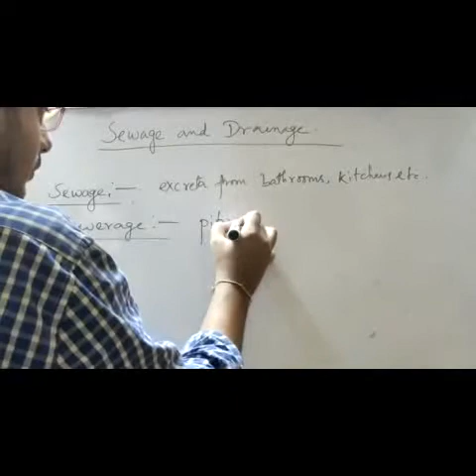There is another term, that is sewerage, related to sewage. What is sewerage? Sewerage refers to the physical facilities like pipes, lift stations and treatment and disposal facilities through which the sewage flows. So sewerage means a pipe or network system through which the sewage flows. These are the excreta from bathrooms, kitchens, etc. And these are the pipes or networks through which sewage flows. This is called sewerage.

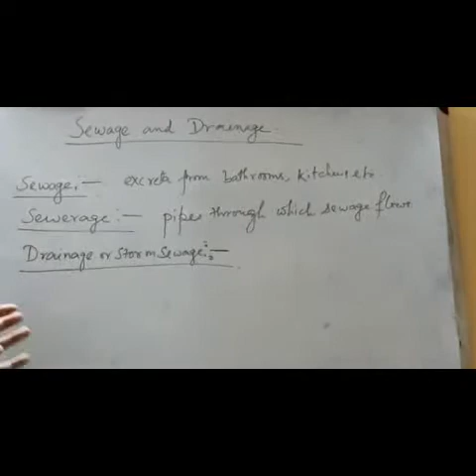The next topic is drainage or storm sewage. What is drainage or storm sewage? It is nothing but the rainfall. The rainfall which is accepted by the runoff is carried by the sewer system or the pipe or underground networks, is known as drainage or storm sewage. That means rainfall.

In terms of runoff, these are the common terms of the solid waste management.

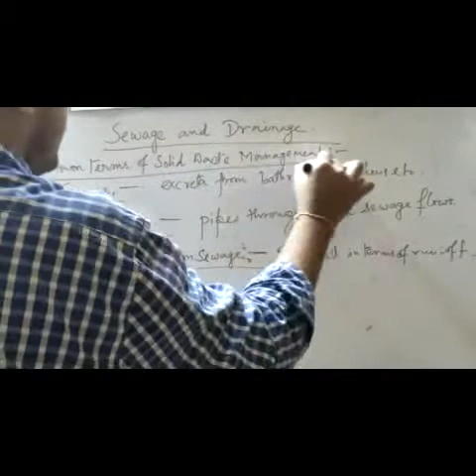So what is the difference between sewage and drainage? In terms of sewage, there are the excreta from the bathrooms, kitchens, sinks, basins, etc. That means there are some hazardous substances. But in the drainage or storm sewage, storm sewer, there is no type of hazardous substance. It means this only consists of runoff.

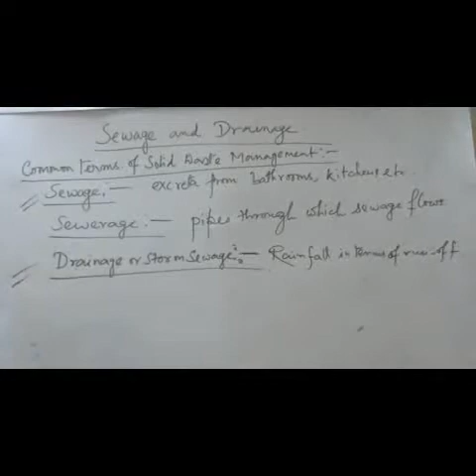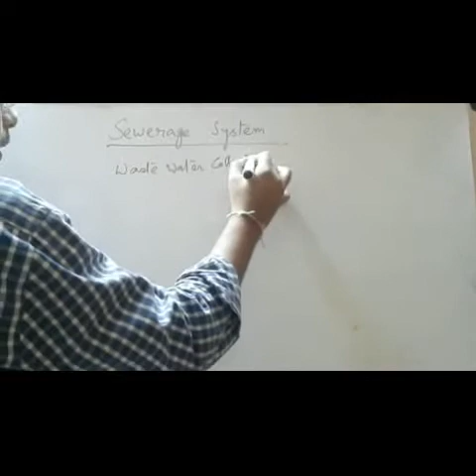The next topic is sewerage system. What is sewerage system? A sewerage system or wastewater collection system is a network of pipes, pumping stations and appurtenances that convey sewage from its point of origin to the point of treatment or disposal. There is another term, that is wastewater collection system. Both are same.

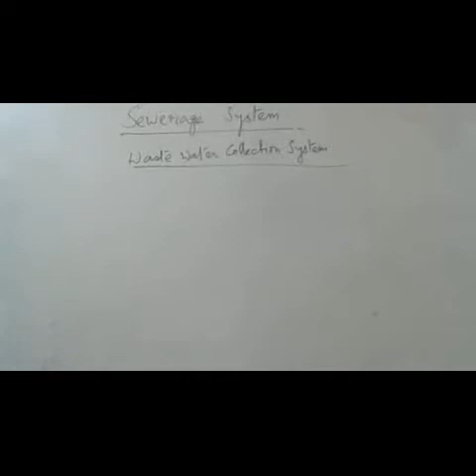So please write down, the sewerage system is the network of pipes, pumping stations, which convey the sewage from its point of origin to the point of disposal.

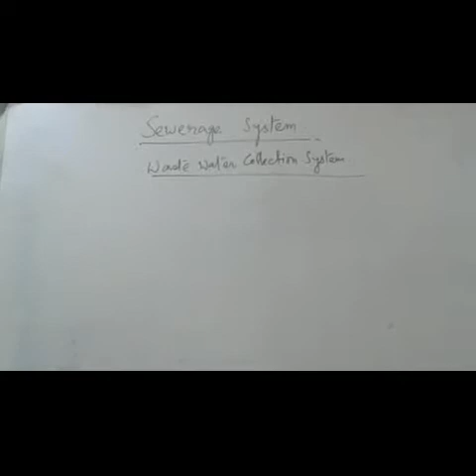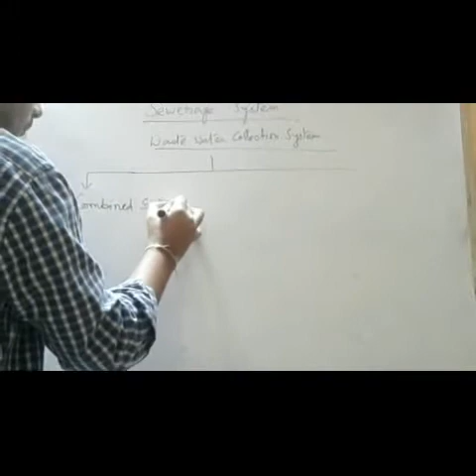There are three types of sewerage system. The first one is combined system. The second one is separate system, and the third one is alternative system.

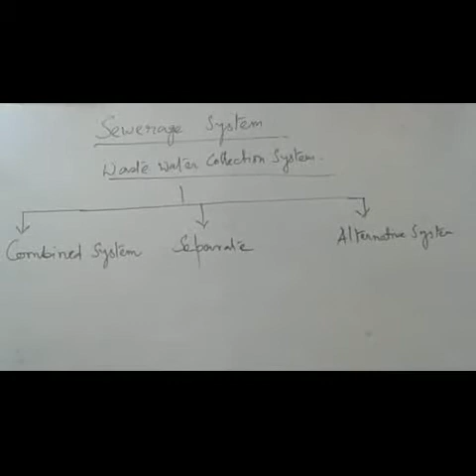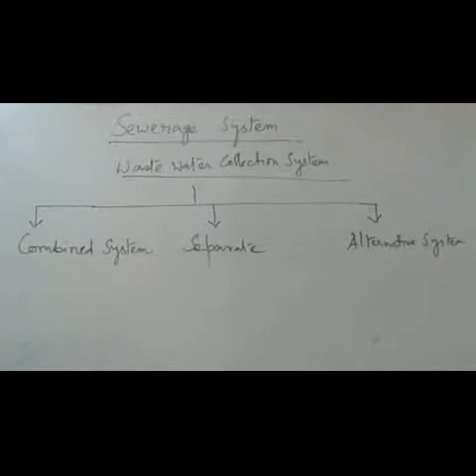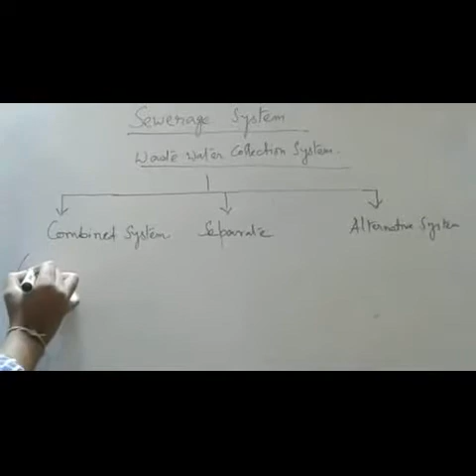First, combined system. Combined system means in this system which carries a mixture of both the domestic sewage and storm sewage, which is called combined system or combined sewer, by which the sewage is disposed or conveyed. So in this combined system there are two types of sewerage that were conveyed: one is domestic sewage and another is storm sewage.

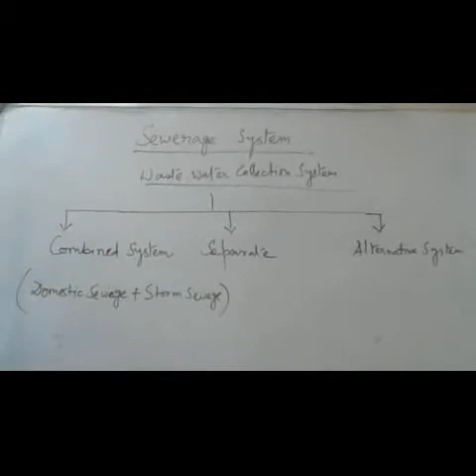But in the separate system there is either domestic sewage or storm sewage. It is conveyed separately. That is why it is called separate system. So it is either domestic sewage or storm sewage.

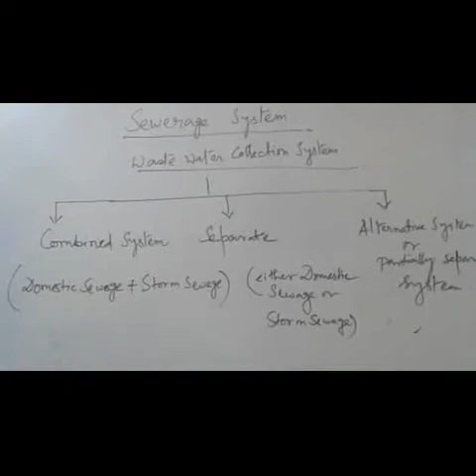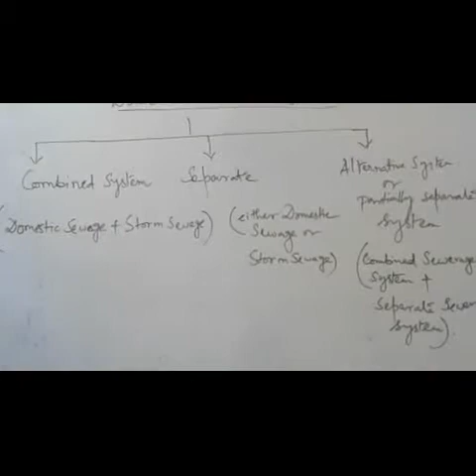And in the alternative system there is also another name, that is partially separate system. So in the partially separate system, it is a combination of the combined sewerage system and separate sewerage system. This type of sewerage system helps to decrease the load from a combined sewerage system and the lag of the separate sewerage system. So it is a combination of combined sewerage system and separate sewerage system.

Now we will discuss about the advantages and disadvantages of these three systems: combined system, separate system and partially separate systems. First, advantages of combined system.

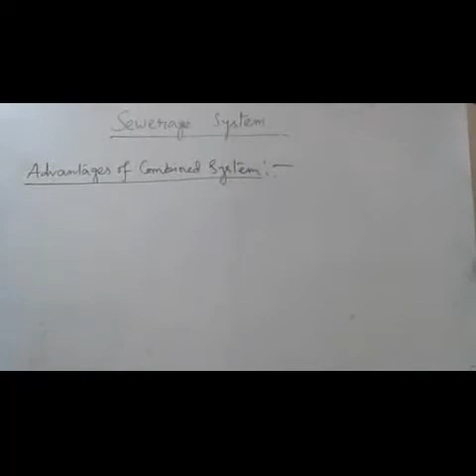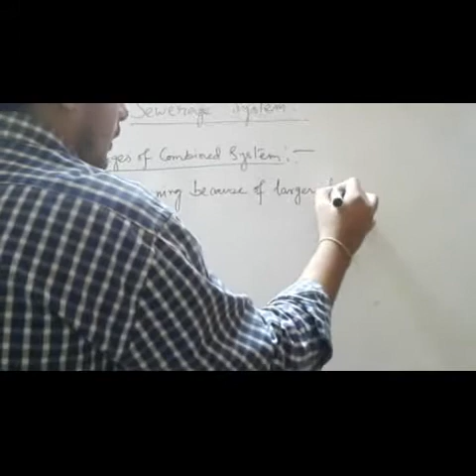The first advantage of combined system is easy cleaning because of larger diameter. That means the diameter of the pipe through which the sewage is carried is very large. That is why the cleaning of the pipes is very much easy. The second thing is very low maintenance cost.

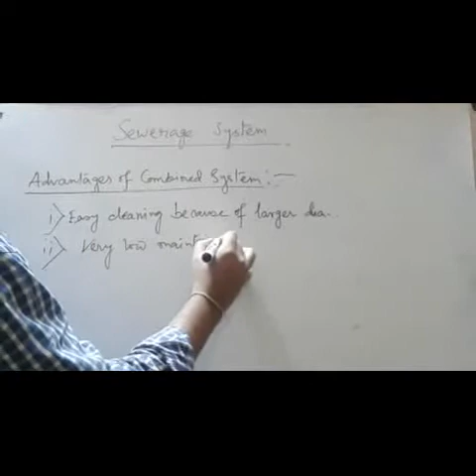Very low maintenance cost. It is a big thing because maintenance is a big part of a project.

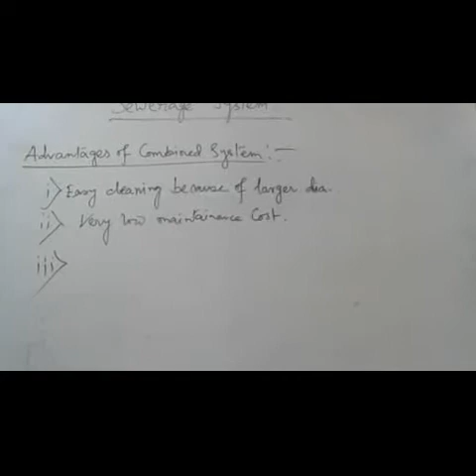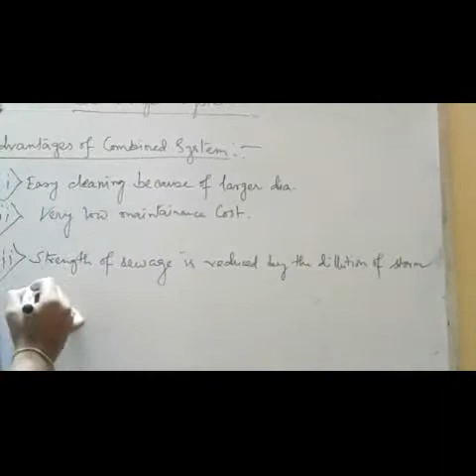The third thing is the strength of the sewage is reduced due to the dilution of the sewage by storm water, as it is a combined system. The strength of the sewage is reduced by the dilution of storm water. What is the actual effect of this? The economic life of the pipe network is increased by this condition.

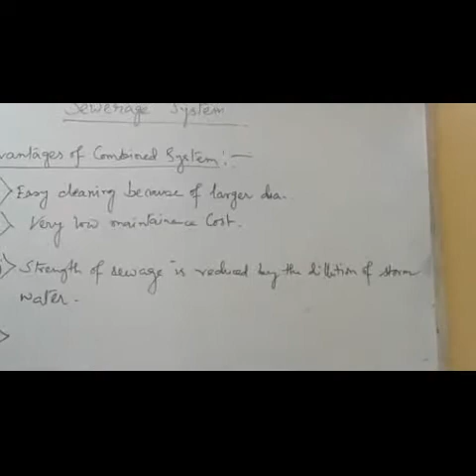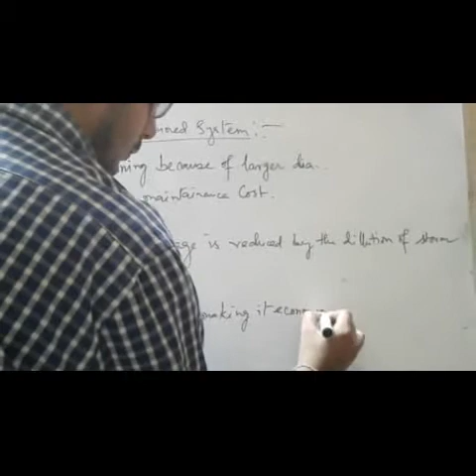And the fourth one is the system requires only one system of sewer. That means as it is a combined system, the system requires only one system, one set of sewer, making it economical. So these are the four advantages of the combined system.

Now we will discuss about the disadvantages of the combined system.

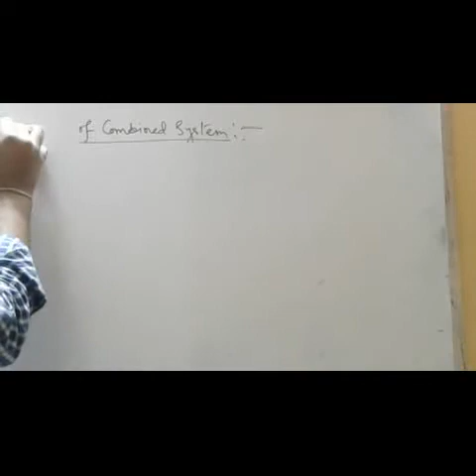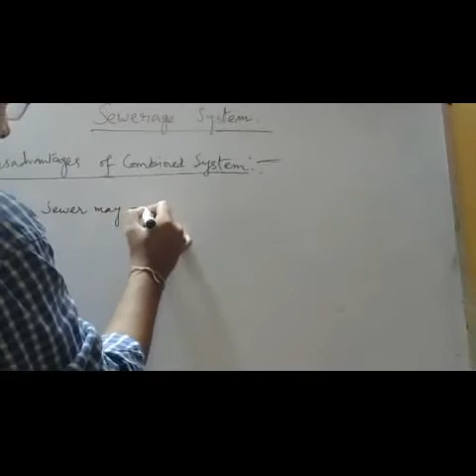The first thing is sewer may overflow in the rainy season so that it may damage the environment.

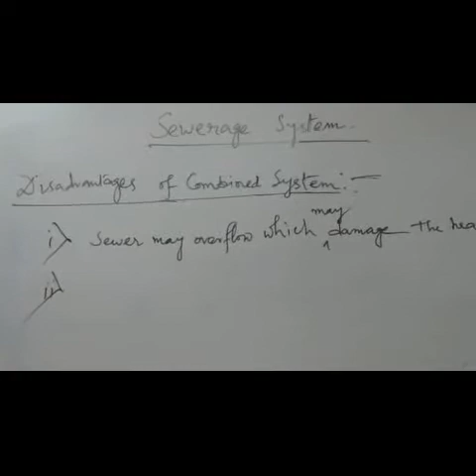The second thing is it becomes dry in the summer season, when the amount of sewage is not present, then it becomes dry and as a result a foul gas is emitted.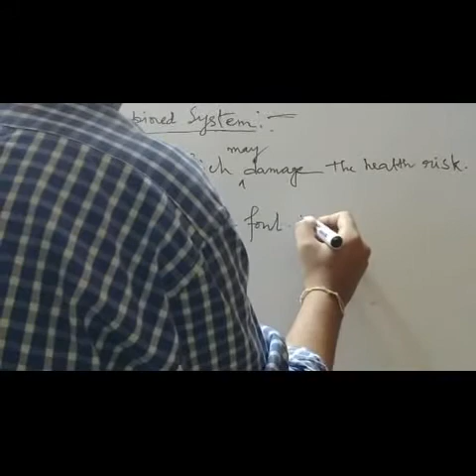The third thing is the load on the treatment plant is more because the storm water is also carried here.

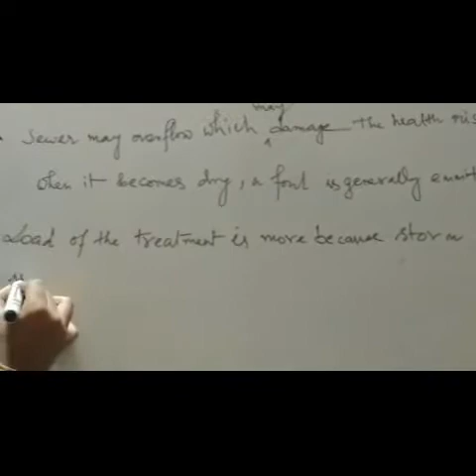The last thing is the system becomes uneconomical when pumping is needed.

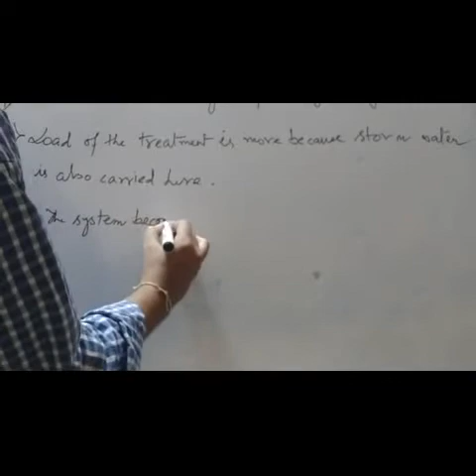So these are mainly the disadvantages of the combined system. Now we will discuss about the advantages of the separate system.

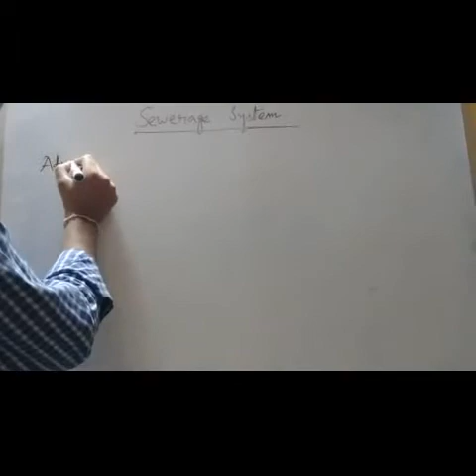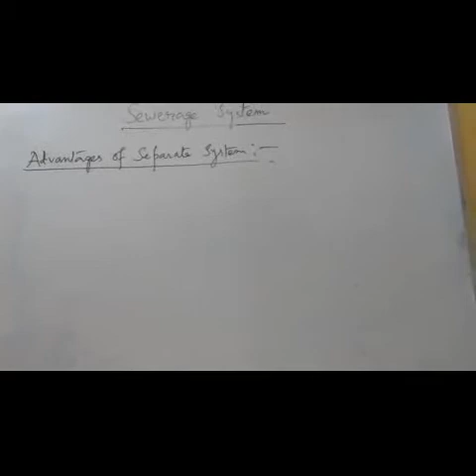The first thing is the load on the treatment plant is less as only sewage is carried to the plant, because in the separate system either the sewage or the storm sewage is carried. So the load on the treatment plant is less.

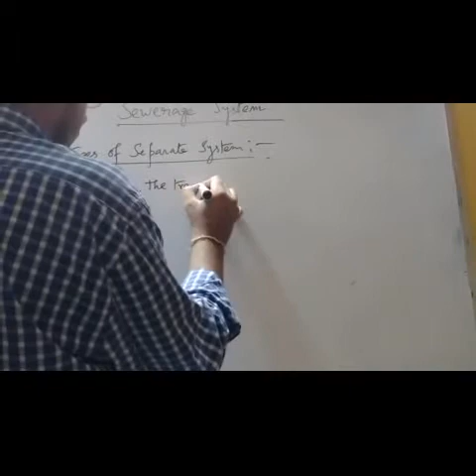The next thing is the size of the sewer is small, thus it is economical. The size of the sewer is small because only storm sewage or only waste water is conveyed.

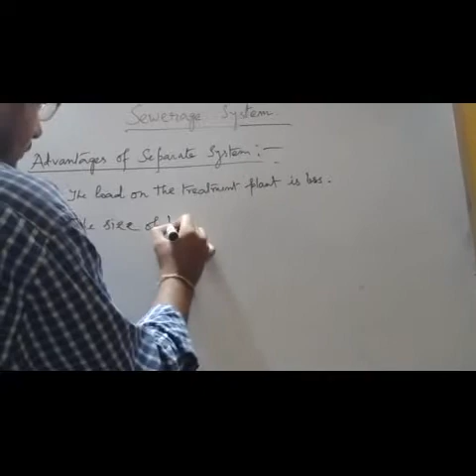The third thing is when the pumping is required, the system is also economical.

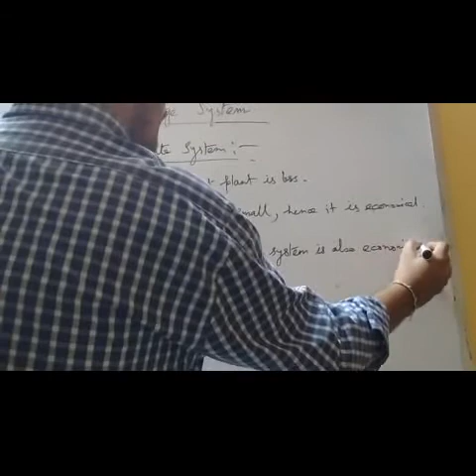And the last thing is the natural water or storm water is not unnecessarily polluted.

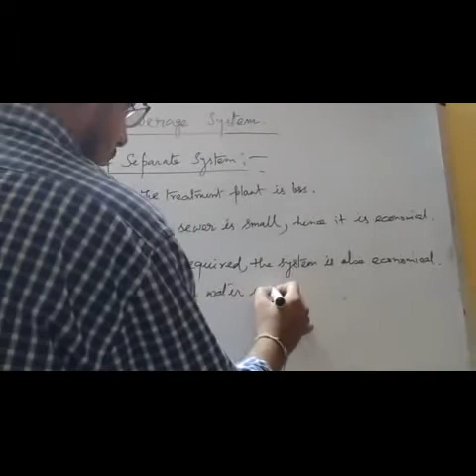These are the main advantages of the separate system. Now we will discuss about the disadvantages of the separate system.

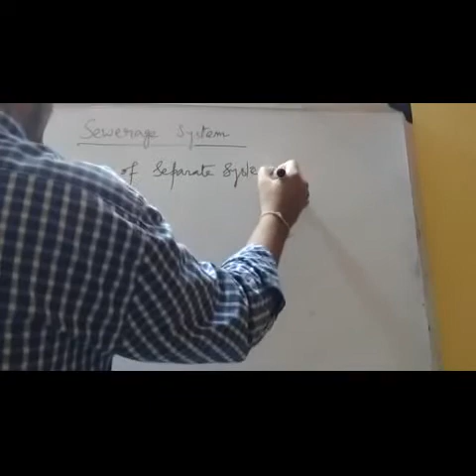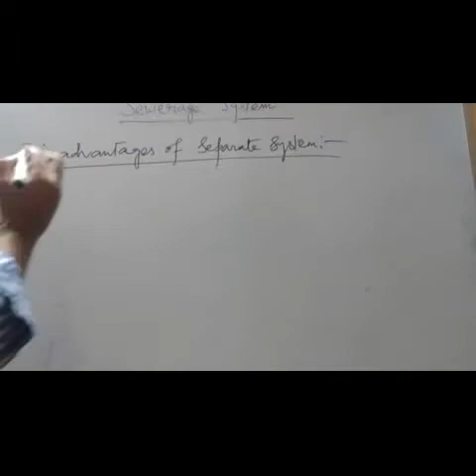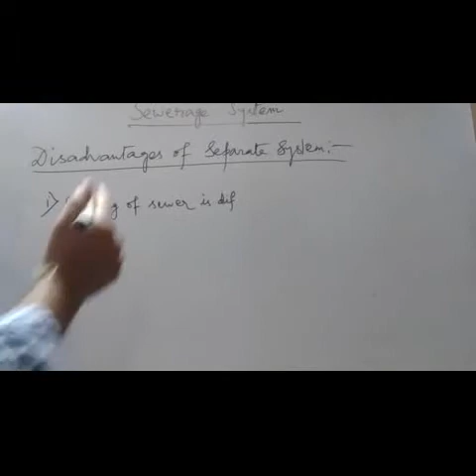As I have already mentioned, in this separate system the size of the diameter is small. So the first disadvantage is cleaning of the sewer is difficult due to their small size.

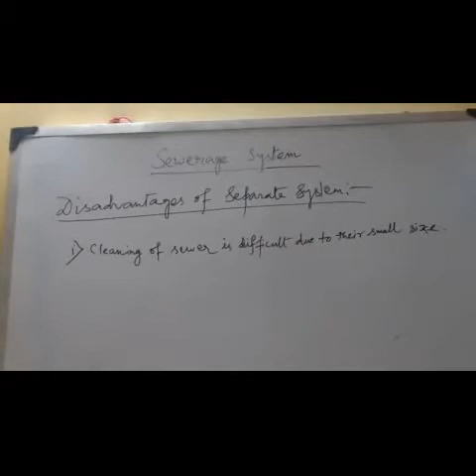The next thing is the self-cleansing velocity is not easily obtained because the diameter of the sewer pipe is small.

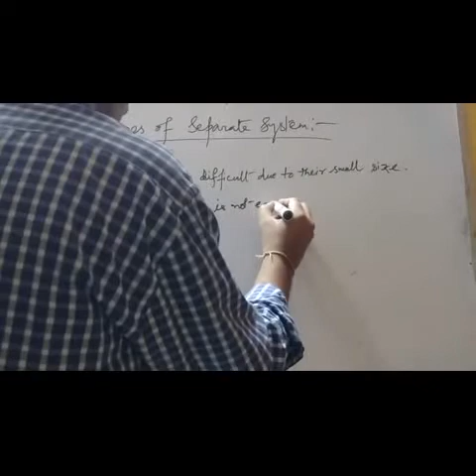And the third thing is the storm sewers come in operation in rainy seasons only because the diameter is small.

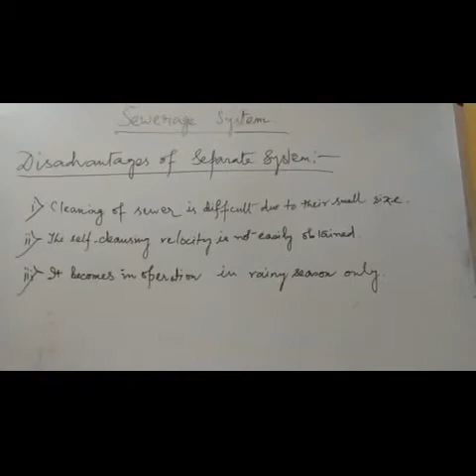Okay, these are mainly the disadvantages of the separate system. Now we will discuss about the advantages of partially separate sewerage system.

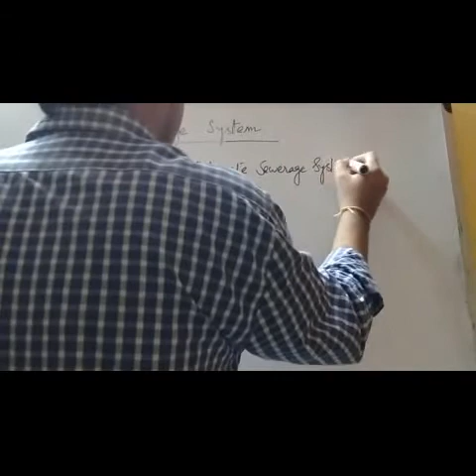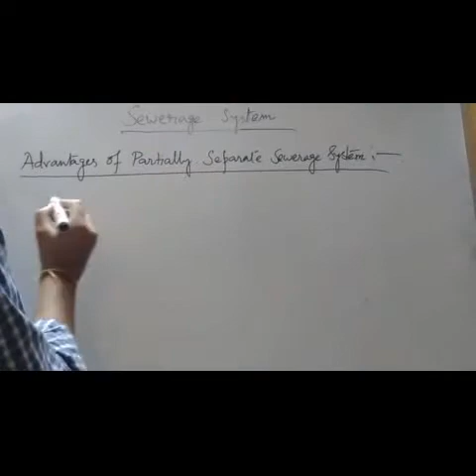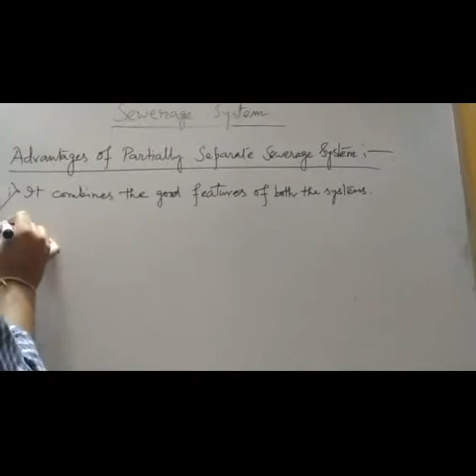The first thing is it combines the good features of both the systems because both the advantages are in there. It is the main advantage of the partially separate sewerage system.

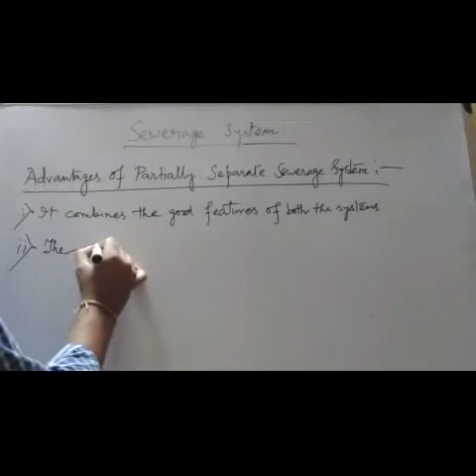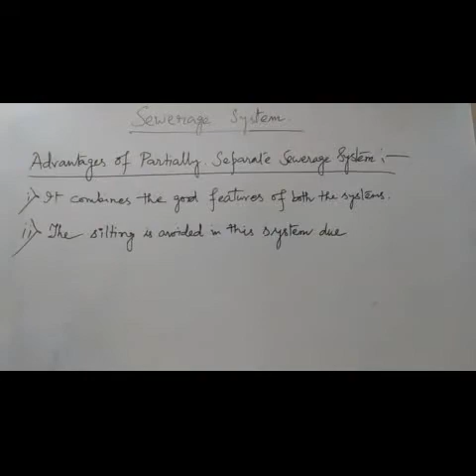And the second thing is the silting in the sewerage system is avoided due to the entry of the storm water. The silting is avoided because when the storm water enters, then silting does not occur.

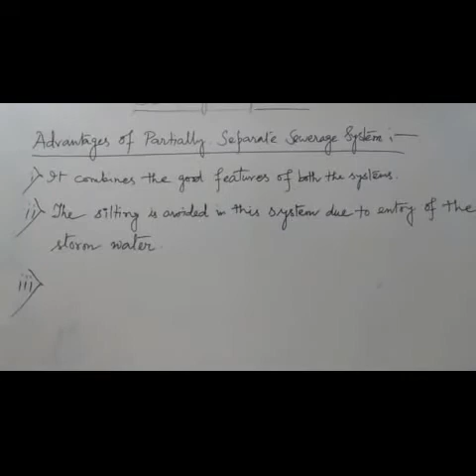And the third thing is the stormwater from the house is easily disposed of.

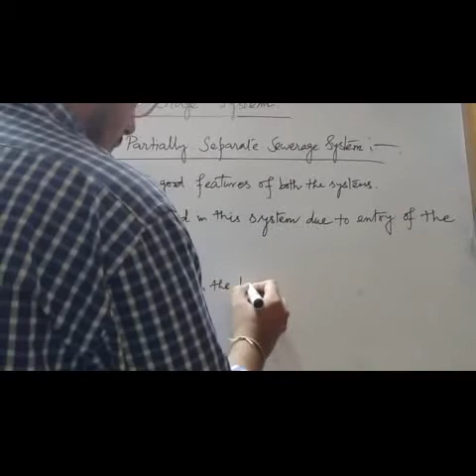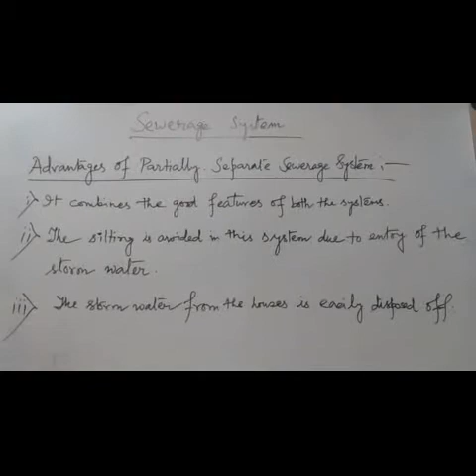And the last one is the sewers are of reasonable size because it is a combination of the separate system and the combined system.

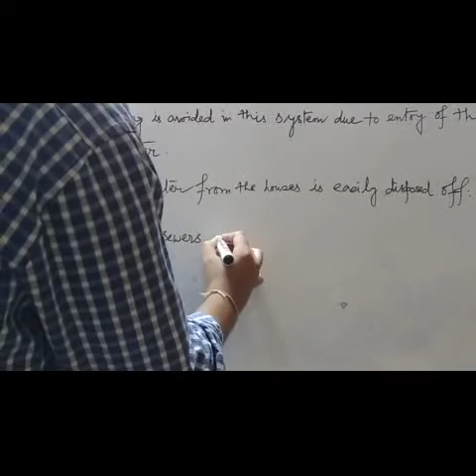So these are actually the main advantages of the partially separate sewerage system. Now we will discuss about the disadvantages of the partially separate sewerage system.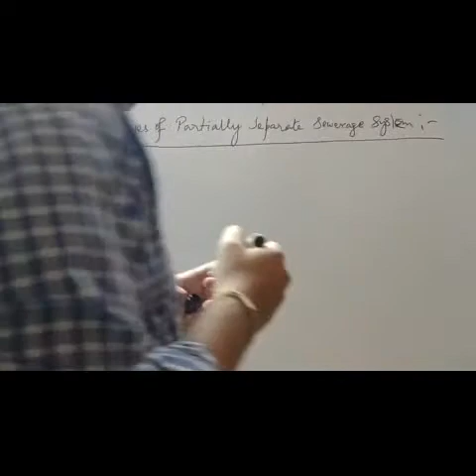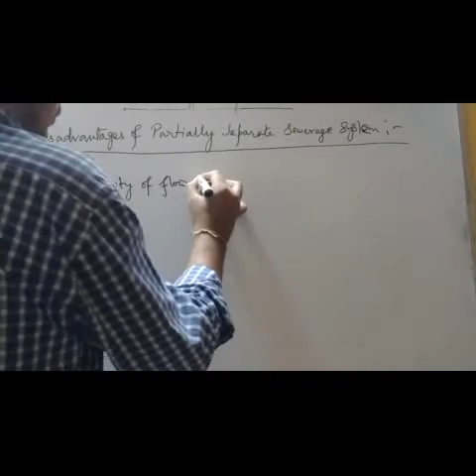The first thing is the velocity of flow is very low in dry weather.

The second thing is there is a possibility of overflow in this system.

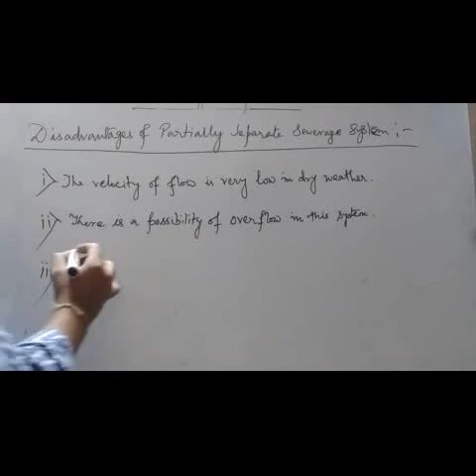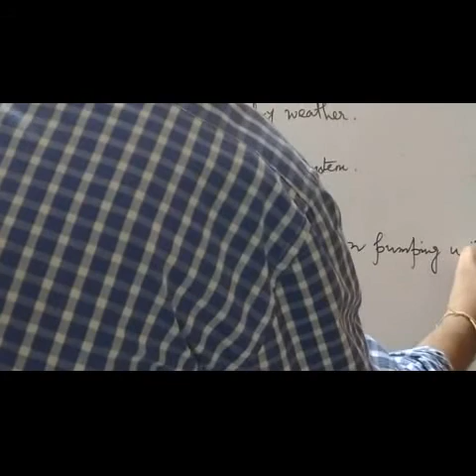And the third thing is the entry of the stormwater in the sewer may increase the load on the pumping and treatment unit, both. The entry of the stormwater increases the load on the pumping unit as well as on the treatment unit. So these are the main three disadvantages of the partially separate system.

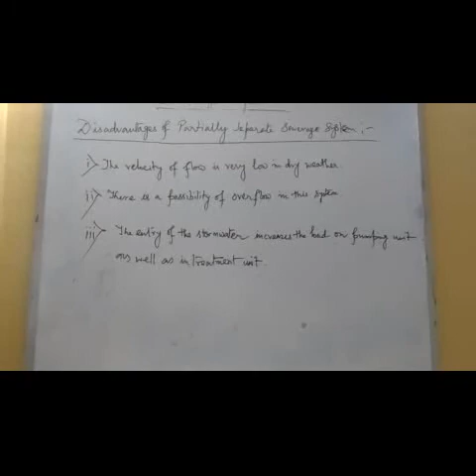Okay, our next topic is quantity estimation of the sewer, which I will discuss in my next video. Thank you.